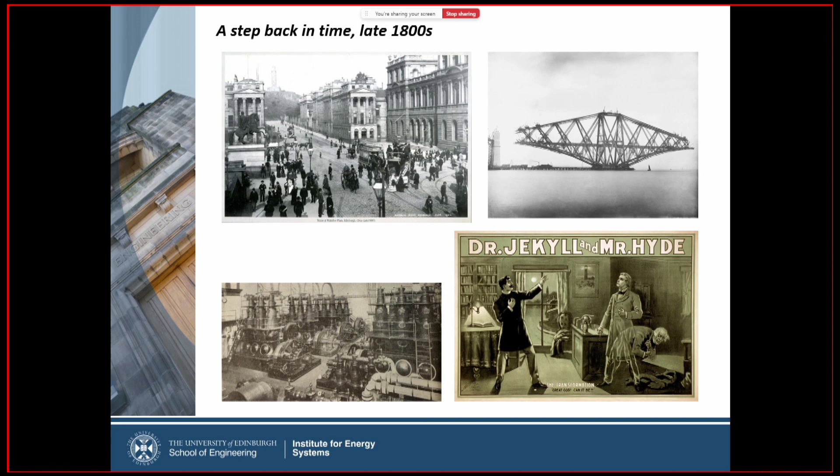It's Halloween now, so I was thinking about Halloween. Dr. Jekyll and Mr. Hyde, written by Robert Louis Stevenson. And the one thing that we proud engineers here at Edinburgh know is that Robert Louis Stevenson studied engineering here. And if you go to his Wikipedia page, the one thing that you read is he hated engineering. And apparently he did everything he could to avoid going to lectures. Amazing. He was such a forerunner for many other students. I joke. But anyway, at that time was a great change in society, technology, the way that people were understanding the world. And there were lots of mechanical, structural, chemical and electrical engineering challenges. Like today, a great time of technological change.

And around about that time, here at the University of Edinburgh, not studying in a school of engineering but natural sciences or natural philosophy, was this gentleman here, James Blyth. In '61, he graduated from here with his Bachelor of Arts, and later on he came back to the university to study a master's. And he was a real inventor, really interested in technology. He started to play with what we would recognize as electrical power engineering, batteries, generation of electrical power. He subsequently went on to become a professor at what's called Anderson's College, the precursor of the University of Strathclyde. And it was at his holiday home on the east coast of Scotland in a place called Marykirk, where he was the first person in the world to design, build, and test a wind turbine.

Now, that was what Marykirk looked like in those days, okay? And here are some of the pictures, quite grainy pictures of some of the first turbines that he built. Hopefully you can see that there. Okay, there's one of his turbines just about there. Okay, turning around and looking at it from the house, you could see that there.

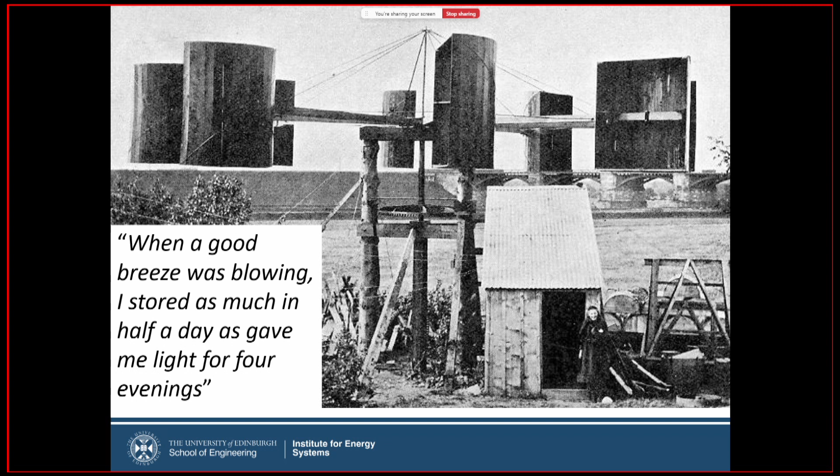A real inventor. Imagine going down to your garden shed and building this kind of thing. And it was really successful. He said, when a good breeze was blowing, I stored as much in a day, half a day, as could give me light for 4 evenings. He had batteries. He was able to store this electrical energy.

And he had so much, this abundance of free energy, that he thought, well, I'm a good person. I want to make the world a better place. I'll offer it to the people of Marykirk. And he talked to the village elders and he said, would you like me to install some of these new electrical lights and use our wind turbine to power that? And they said, no. They said, it's the work of the devil.

We don't want it. So that's the starting point for today's talk, about the things that scare us about wind energy, the monster turbines that make shivers run down our spines, and some of the scary engineering science of wind energy. So, let's get into that. You may notice a few Halloween bits in this talk. So if you want to keep a count of all the different scary things that come up, we'll see how many we have at the end.

So, today, why are we interested in wind energy? Let's have a little look at that. And there are a few different reasons why there's so much interest in the outside world about wind energy today. And some of these will be familiar to us, but let's quickly fly through them. One of the things that we hear a lot about at the moment is net zero, moving towards a society where we have reduced our carbon emissions.

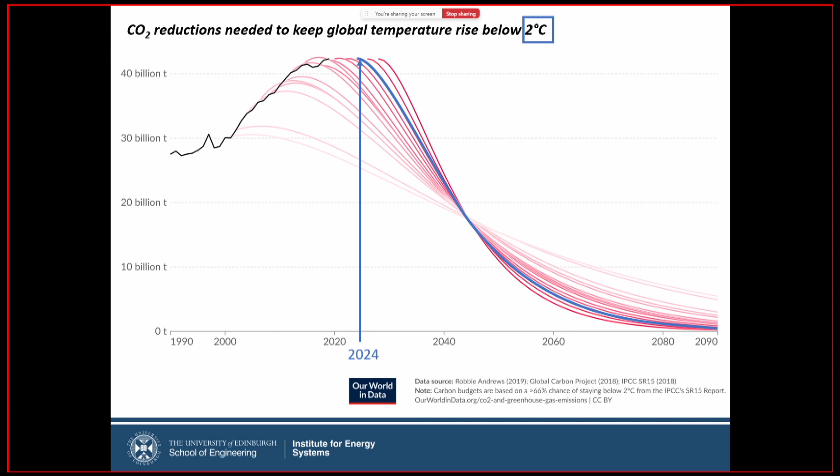And here, this is some of the work that informs many of the different international treaties that we sign up to. And this is what we need to do as a world if today we start seriously trying to reduce our greenhouse gas emissions. And we have to rapidly reduce the amount of emissions in every country. Whenever I look at this graph, I'm reminded of a saying that my Irish in-laws always tell me, that this isn't the best place to start from. If we'd started a few years ago, our transition would be much easier. But we're moving towards an energy system which doesn't release as much greenhouse gases.

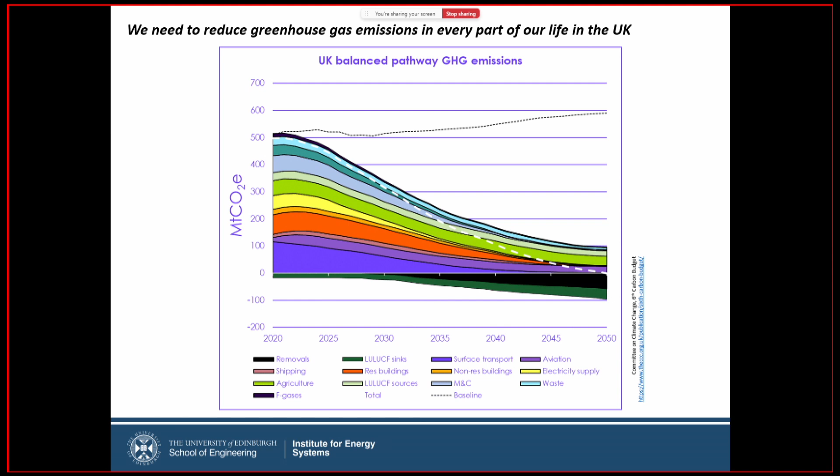As we cascade from that international motivation down to the UK motivation and what we want to do, this is from the Committee on Climate Change. In every sector, in every part of our life, in every part of our society, we need to reduce the amount of greenhouse gas emissions. And that means moving every sector to one which is using renewable energy to provide that energy.

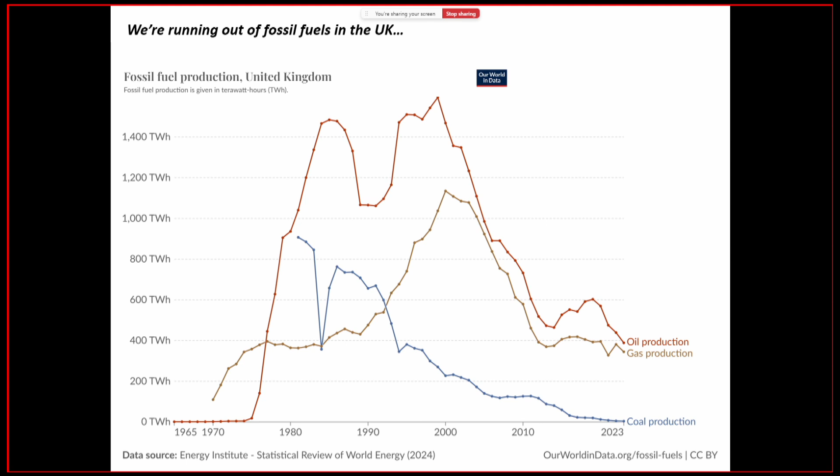Even if that wasn't happening here in the UK, we have other motivations. We have motivations in that the forms of energy that have been driving our society for decades or centuries are running out. So the costs of extracting oil and gas mean that the amount that we have available is reducing. So self-sufficiency and energy security require us to move to something which doesn't rely on imports.

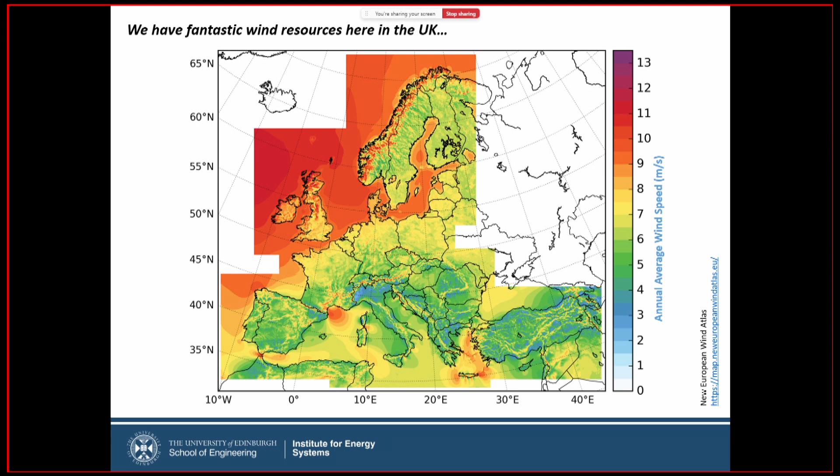The other reason why wind energy here in the UK is because it's, well, really windy. And that we instinctively know, but here we can prove it to you. The darker colors here mean it's really windy. And in the UK, Ireland, anything that's close to the Atlantic, fantastic wind energy resources. We are blessed by how good our wind energy resource is. And that means that the cost of generating electrical power from wind is much lower than in many other countries.

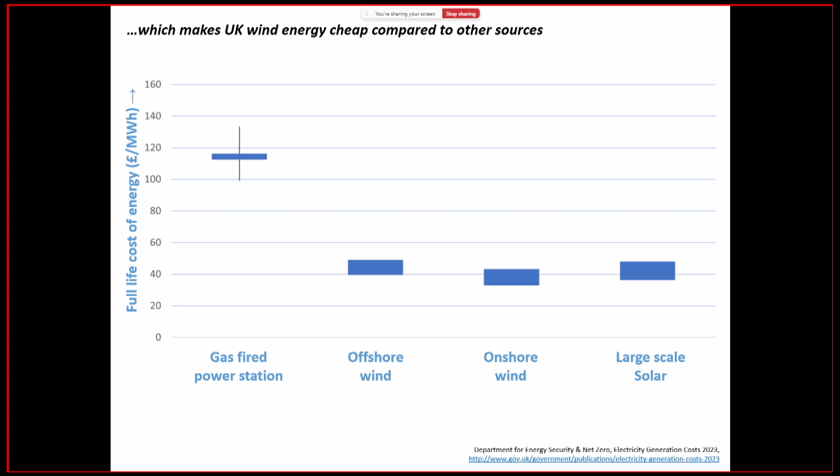And different people look at the different costs and the through-life costs of different technologies. This is some data that comes from the UK government. And it tells us that today, wind energy can deliver some of the lowest lifetime costs of energy. So it's good stuff. It's good stuff to go for.

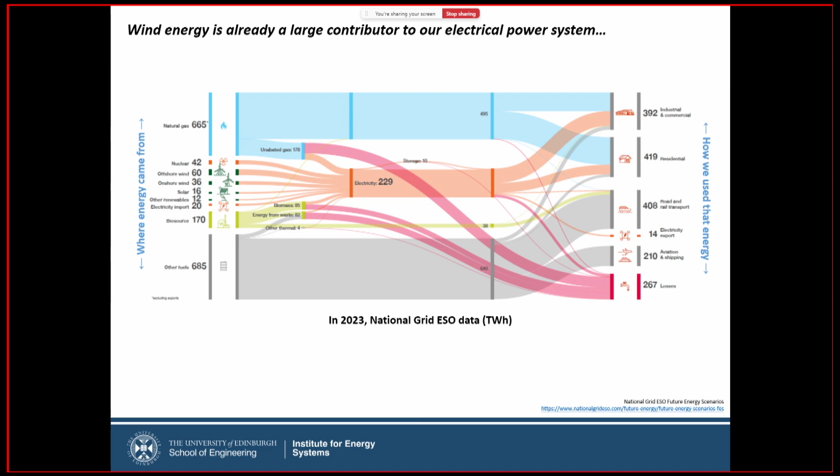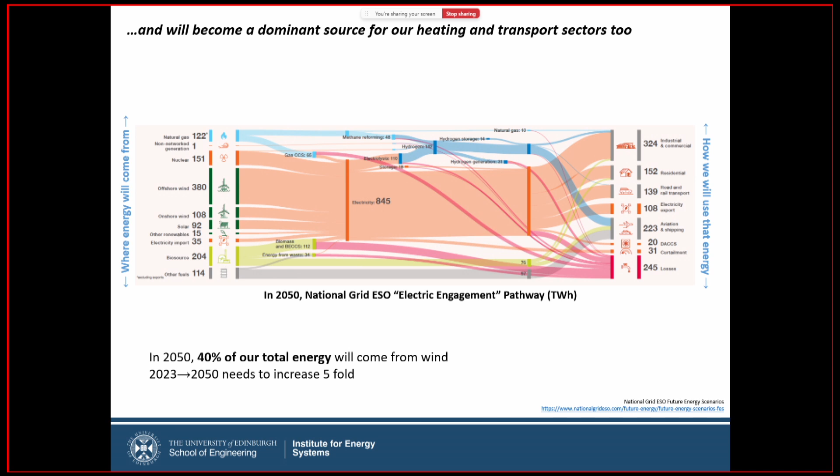The plans, the forecasts, the scenarios, and the pathways to getting towards net zero look a little bit like this. In 2050, according to most of these different pathways, 40% of our total energy, the energy we use for heating and transportation, is going to come from wind energy. That means we need to scale up by about a factor of 5 how much energy we get from the wind.

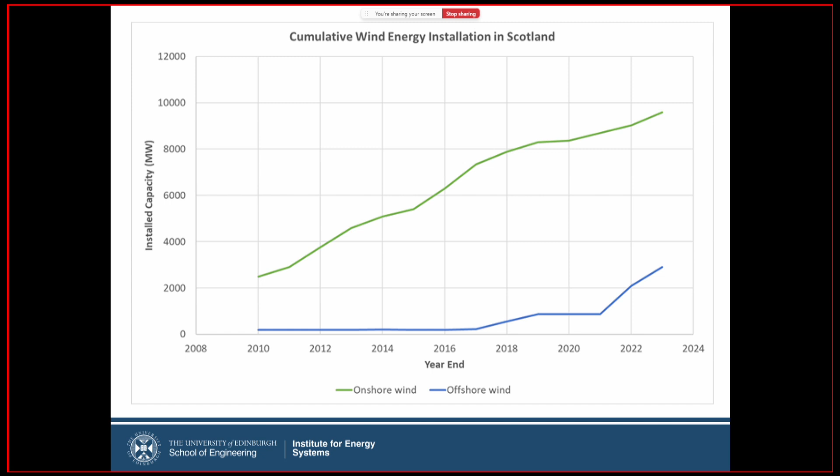These are really big numbers. How are we doing in terms of getting there? Well, we've got good news. In places like here in Scotland today, if we look at the last few years and how much wind energy we've been installing, we're making good progress. Green here is onshore wind in Scotland. Blue is offshore wind. That's taking off and starting to increase quite significantly, and will continue to do so over the next few years. Good news.

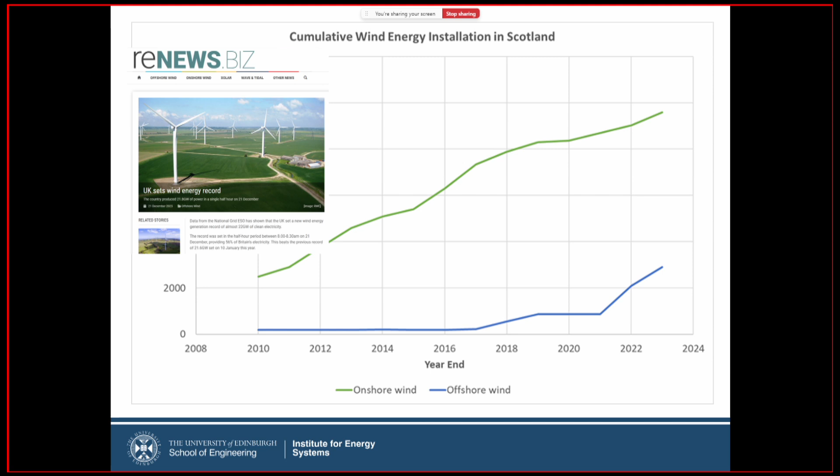If we look at it from the UK perspective, every year, it seems every month, we seem to be smashing records. The most in a year. Wind energy is starting to dominate our electrical power system. Records coming down. Really good news.

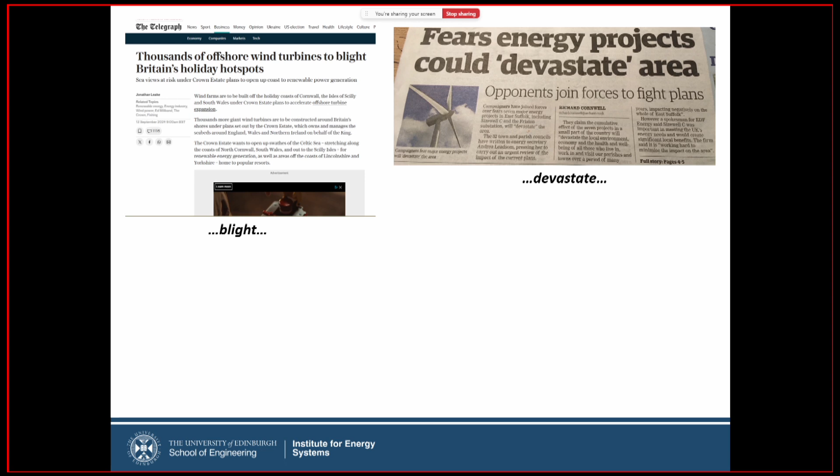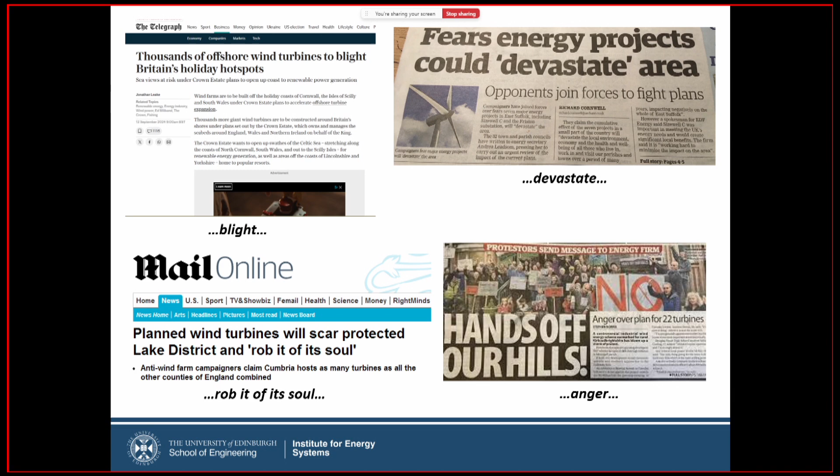But I'm sure many of you also have a look at some of those newspaper headlines or things that pop up on social media. Headlines that say things like, wind turbines will blight your holiday hotspots. They will devastate your area. They will take where you live, the landscape, and rob it of its soul. And just angry. And it appears to me that wind turbines really scare us, or some of us, or we worry about them.

So do they scare us? Why do they worry us? If you have a device, I'm going to poll you, see how you are. You can either use that QR code, or you can go to wooclap.com and add in that event code, and you will be asked 3 different questions. Those questions: the first will be about your support for onshore wind energy, your support for offshore wind energy, and it will give you a scenario where someone is going to build a wind farm near you, maybe at Blackford Hill, if you live near here.

Think about it as being Blackford Hill. How much do you think about that? What do you feel about that? Is it working? Yeah, it's working, okay. We'll use you as a little sample, and then I'll show the results as they come in, and we'll compare you to the general public.

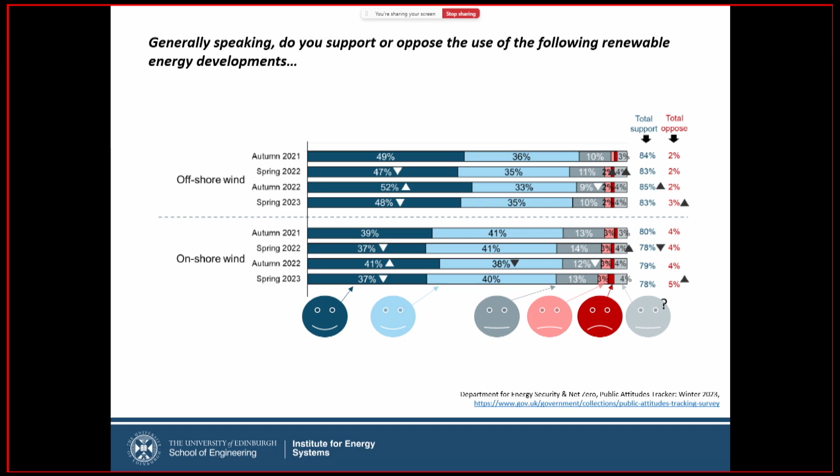Okay, back to there. So if we looked at the general public, there's a slight discrepancy between offshore wind and onshore wind. Generally people are quite happy with offshore wind because it's somewhere further away from me. And if we slightly bring it, still in the abstract and the generic, bring it slightly closer, onshore wind, but not where I live, it's still very happy. And that's what happens generally if we keep on going back to the UK public and asking the question again and again. These numbers change a little bit from quarter to quarter, year to year, but generally speaking, people are very positive in the abstract.

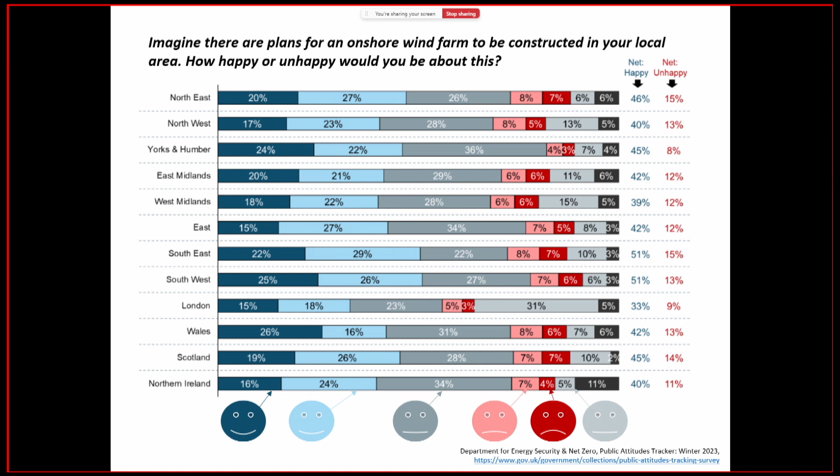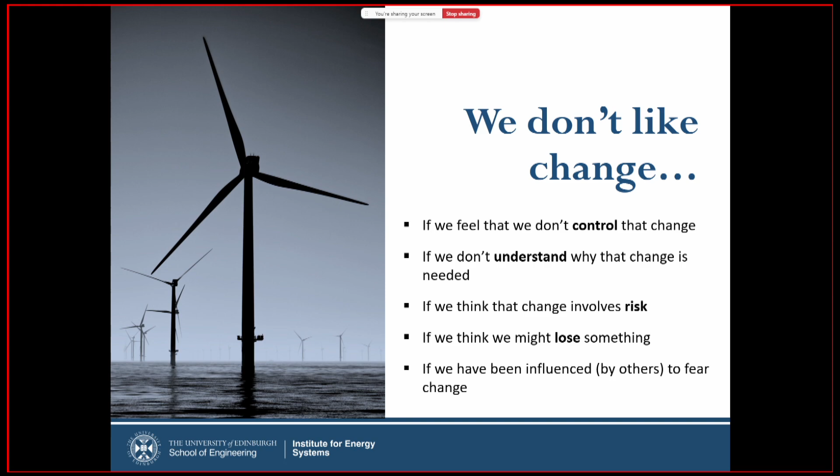And why is that? Are you hypocrites? Well, we probably are. But it's a slightly different question. It's a generic question, an abstract question, versus a real question. And one thing that I've kind of noticed throughout life is that generally people don't like change. And we particularly don't like change if we feel like that change is something that we're not in charge of, that is happening to us, so we don't have control. If we don't really understand or believe we need to have that change. Sometimes if we think that change has a risk. And sometimes if we think that we might lose something with that change. And the other thing that sometimes happens for those of us that work in renewable energy is that sometimes there's information which isn't quite correct, and it sometimes feels like people are influencing others to try and reject that change, and some of those headlines are to do with that.

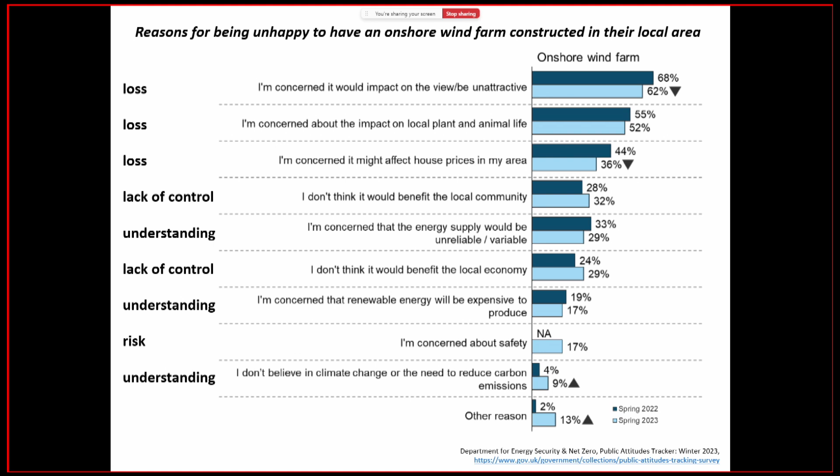If we go and ask the public why you're not interested in it, why you don't want wind energy, and dive into the details, they talk about things like noise, view, things like that. And we can partition these into different aspects. And actually the planning system looks at a lot of these different aspects and tries to make sure that wind turbines and wind farms, when they're built, make sure these aren't a problem. But you could think about these as those where it's being done to us, people are making money, we're not going to benefit from it. That's control being done to us, we're losing control. Sometimes it's because people don't understand the motivation or don't believe in it. Sometimes it's risk, I want safety. And sometimes it's a feeling that we might lose something, and that might be our visual amenity.

You're welcome. Now, today, it's not like that. We can't have big, concentrated power stations. We need renewable energy, and it tends to be quite dispersed. Now, unfortunately, that means we need to put more devices out there. And that does mean that we need to democratize and spread out the change in visual amenity.

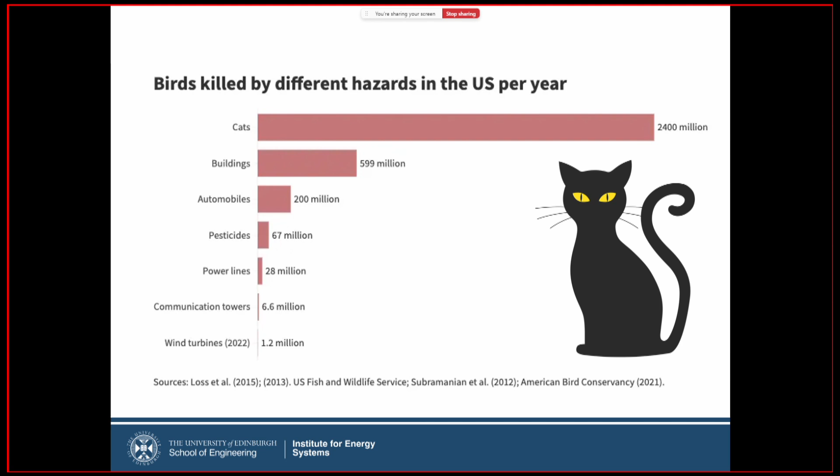So, joking aside, the things that we do when we're developing and planning a wind farm include really quite significant surveying of bird life to try and make sure that the impact on bird life is minimized. Yet at the same time, we don't do anything like that when we build a building. And so we actually set a higher threshold of evidence for wind farms.

House prices, that's something that people really care about. This was some work done through the Climate Exchange, which has run out of the city centre here. They were interested in how putting a wind farm near a property affects property prices relative to a control somewhere else that doesn't have any wind farm. The conclusion they came to was that it doesn't really make that much difference at all, which I found quite surprising.

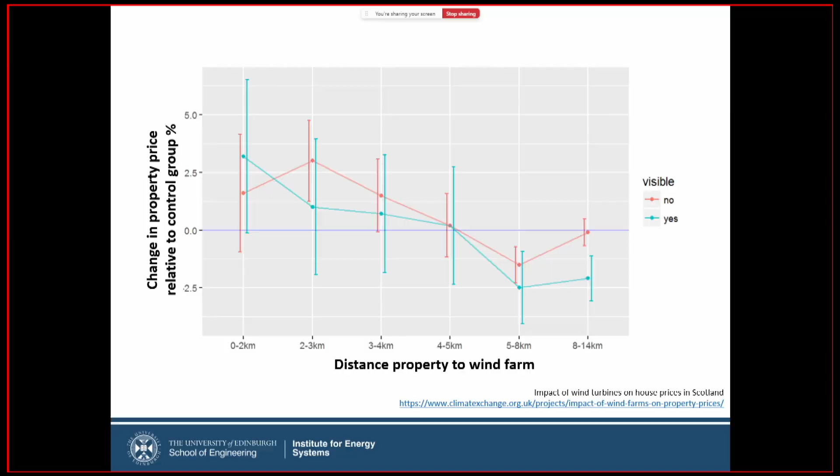The other thing that people worry about in wind energy is how expensive it is. Actually, the interesting thing about how our energy system works today is at any given moment in time we find all the different types of generators, going from the cheapest on the left-hand side to the most expensive on the right-hand side. When we work out how much electrical power we need, we take the price of the most expensive thing, and that's what all the generators get.

Today, on most days in the UK, the most expensive thing is gas. The only thing we could really do to bring that electricity cost down is to try and increase the amount of renewable energy. Many people worry about the price of electricity - you read it in the paper. Is this because of our net zero? Is this the reason for our electricity price? No, the reason is it's so expensive today to make electrical power from gas.

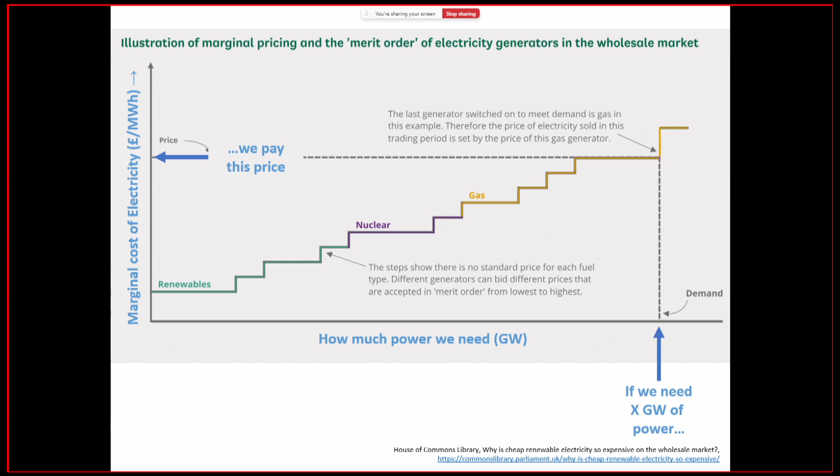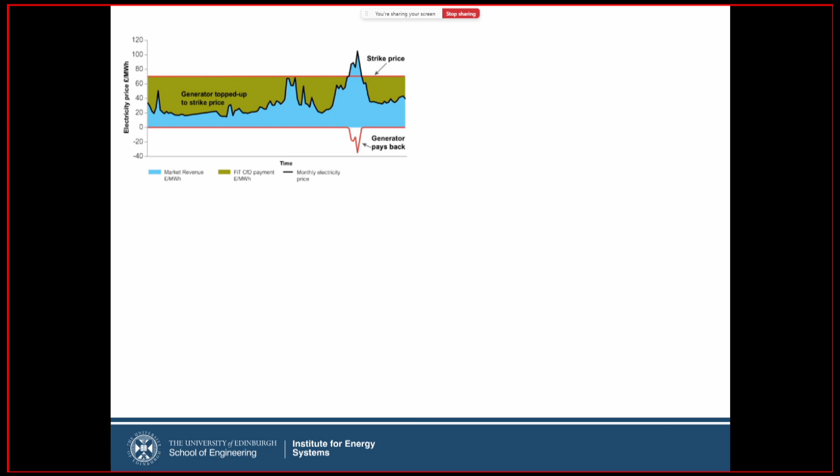Indeed, if we look at what happened during the problems in Ukraine and the subsequent cost of gas, in some of the ways we produce and sell electrical power today using something called a contract for difference, when the price went really high - and some of these have what we call a strike price or a limit price - when the price of electricity goes above that, they start paying money back to us. That's what happened during that moment when the cost of electricity went really high.

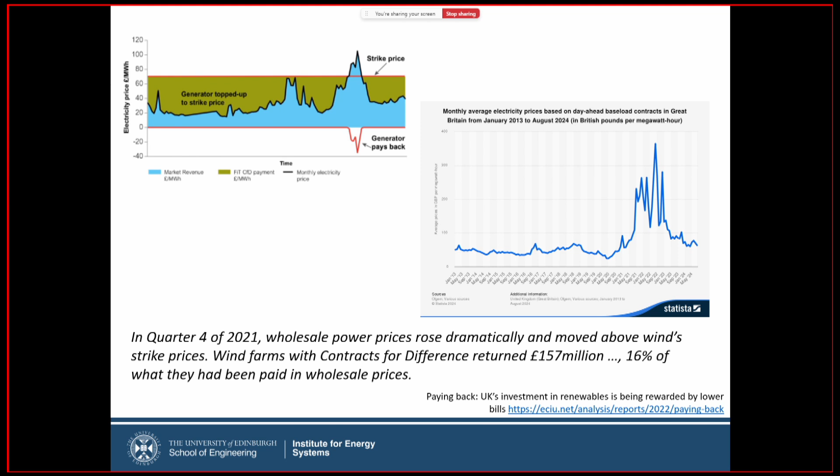The wind farms with contracts for difference started to pay us money back. They were starting to reduce the amount of cost. So actually, today, relative to some of the other ways of generating electrical power, wind is relatively cheap compared to some of the competing technologies.

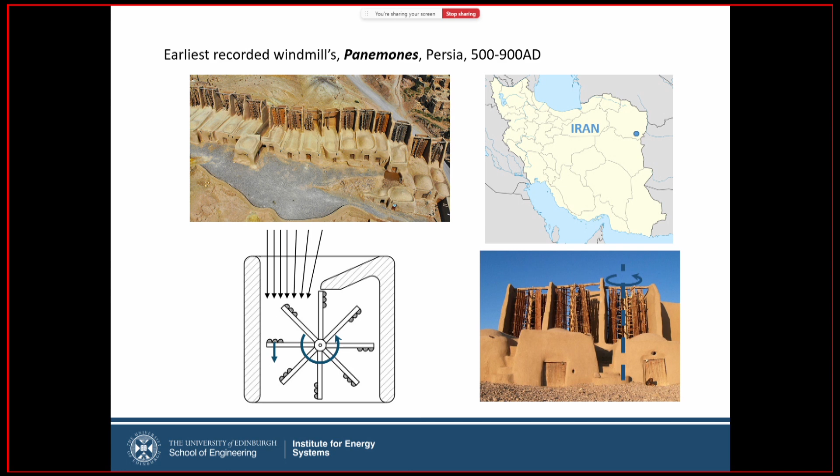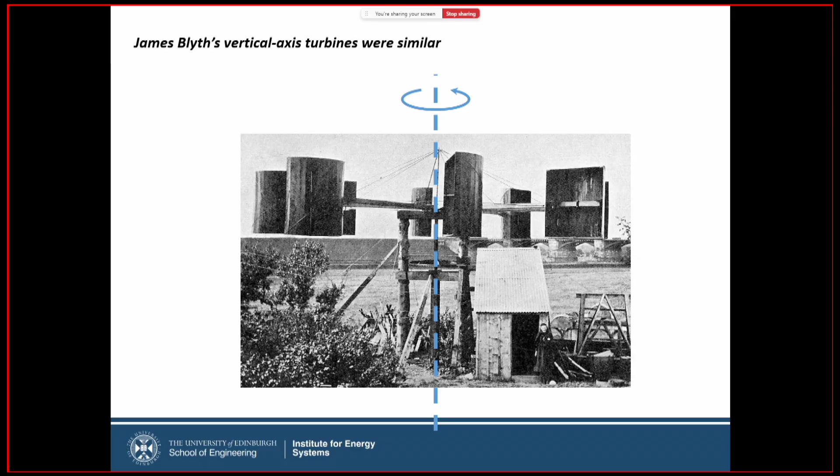James Blyth's system looked very similar to that. Again, it's a vertical axis turbine. There was no wall to protect one side of the rotor, but rather he had sails shaped in a particular way, where one side of the sail has a certain drag coefficient and the other side has a different drag coefficient. That differential force forces the thing to go round. That's how he started.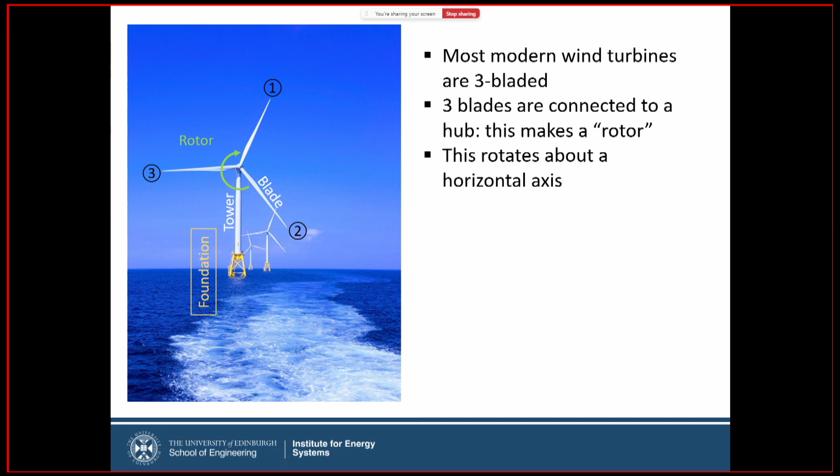But if we look at modern wind turbines, they're what we call horizontal axis. They have 3 blades, connected together to something called a rotor, and they turn. We've got a little one down here that we'll look at in a bit.

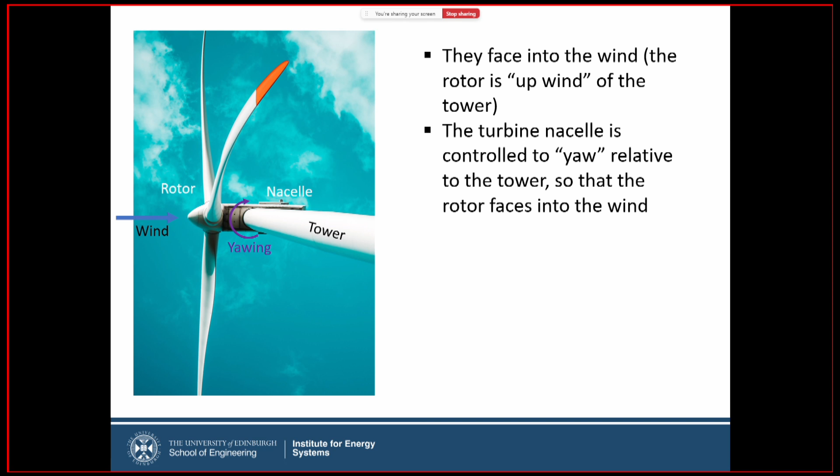Generally, the rotor is positioned in front of a tower to always point towards where the wind is. Wind direction changes quite frequently, we measure that, and the turbine yaws, moving the rotor to face into that direction.

As the rotor moves around in space, it actually sees wind from two different directions. One is the wind moving towards it, but also if you were to hold on to this turbine blade as it rotated through space, it would appear as if the air was moving towards you. That blade is rotating, and if you held on to it, it would look like the world was moving towards you, the air was moving towards you. So that in itself looks a bit like wind.

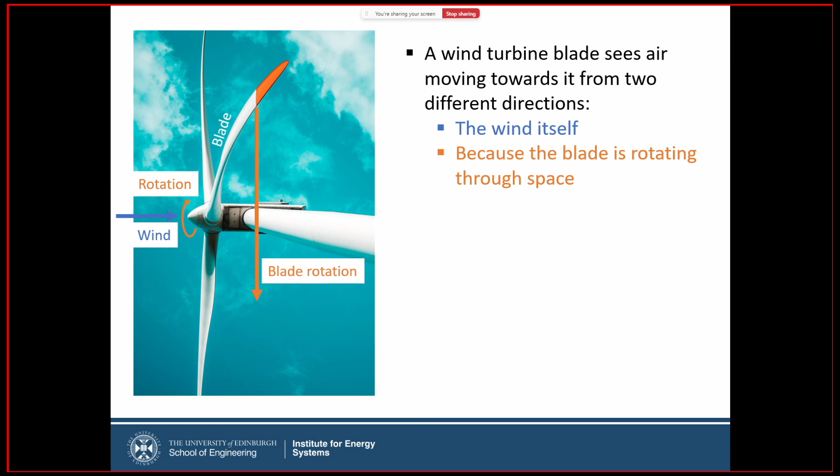These wind turbine blades move through space so quickly, often about 100 meters per second for an offshore wind turbine, maybe 70 meters per second onshore. That's about 8 to 10 times faster than the actual wind moving towards the wind turbine.

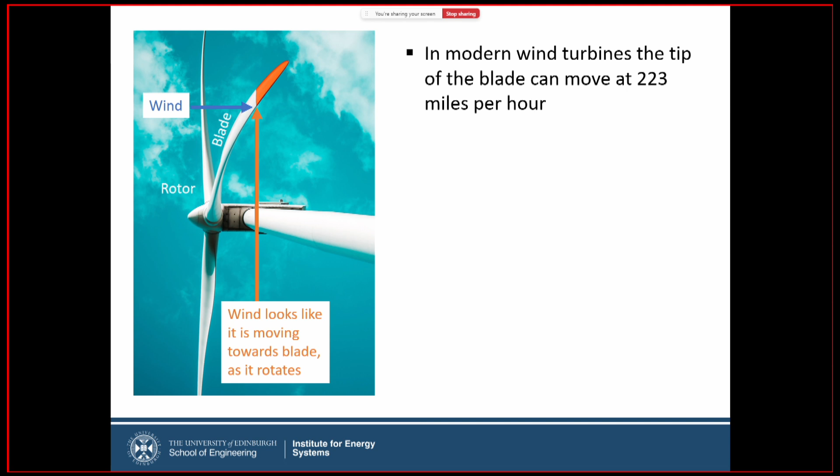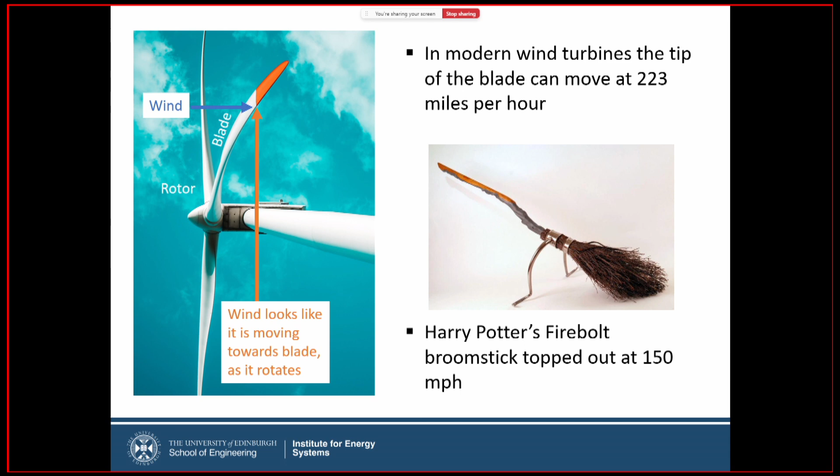I looked this up in terms of witches and wizards. A tip at 100 meters per second is about 223 miles per hour. Harry Potter, I had to look this up, first started with the Nimbus something, which was quite good, but then got upgraded to the Firebolt, which is 150 miles per hour. There's something called a Firebolt Supreme, but it didn't tell me how fast that was. So anyway, the blade tip is faster than Harry Potter is moving through space.

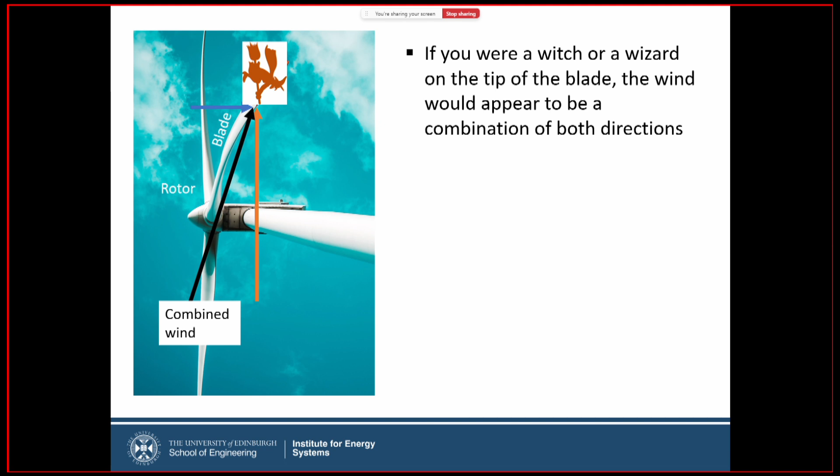If Harry Potter wanted to hold on to the tip of the blade, he'd be having the ride of his life. If you were a witch or wizard at the tip of the blade, it would appear as if the wind was coming slightly from you, the wind itself, but also you're moving through space and it's moving towards you. The combination of that produces a result.

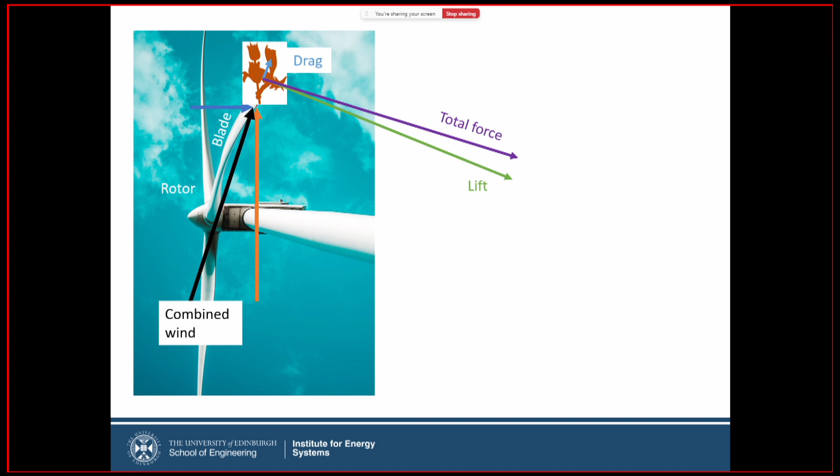You would feel a lift, a big force following the green bit, and a little bit of force starting to slow you down, called drag. You can combine those two together to get a total force, and you can do that at every bit of the blade and add them together.

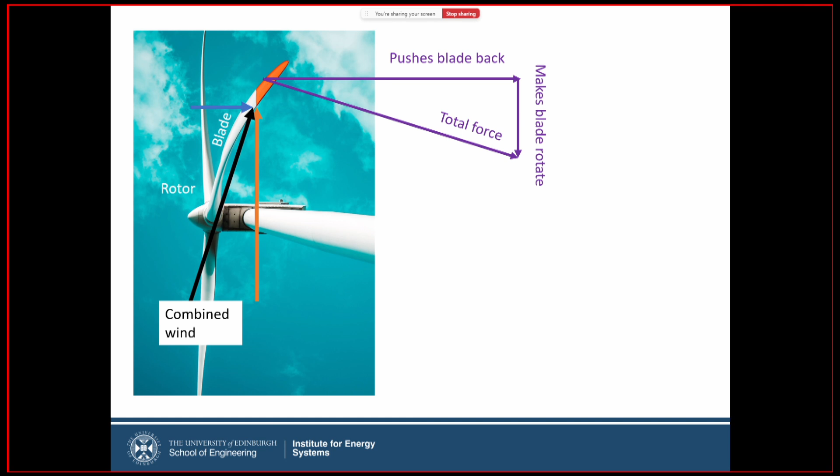When you add them together, you get two components on this rotor: one tending to bend or force the blade back towards the wind turbine, and another tending to push the blades forward to make it rotate. One of those forces we call thrust, which gives structural engineers and designers of these wind turbines headaches. The other component produces something called torque.

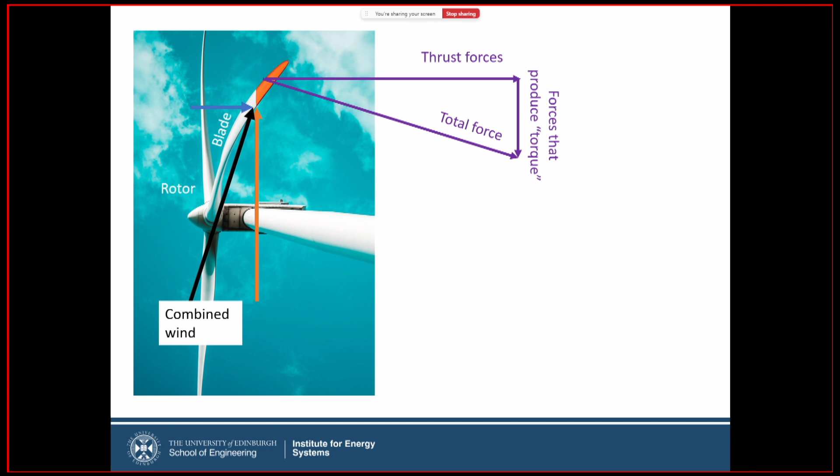Torque is like when you've got a jam jar and you're trying to open the lid - you apply a force at a distance from an axis, and you twist it and it rotates. It's that torque which we're going to use to produce electrical power.

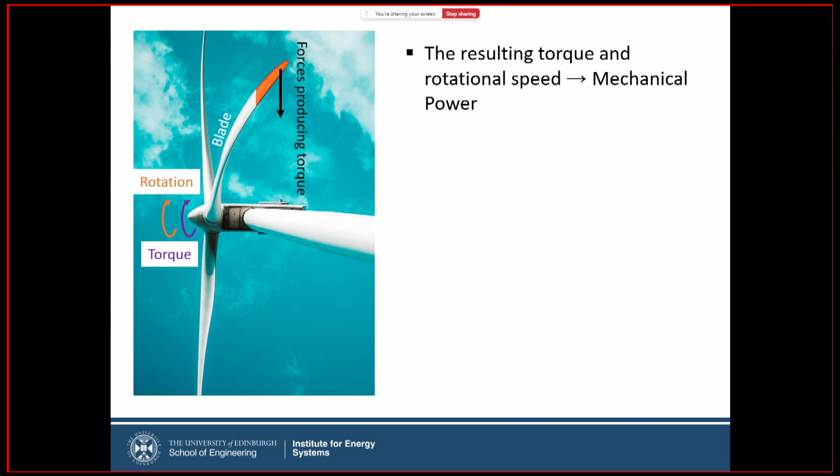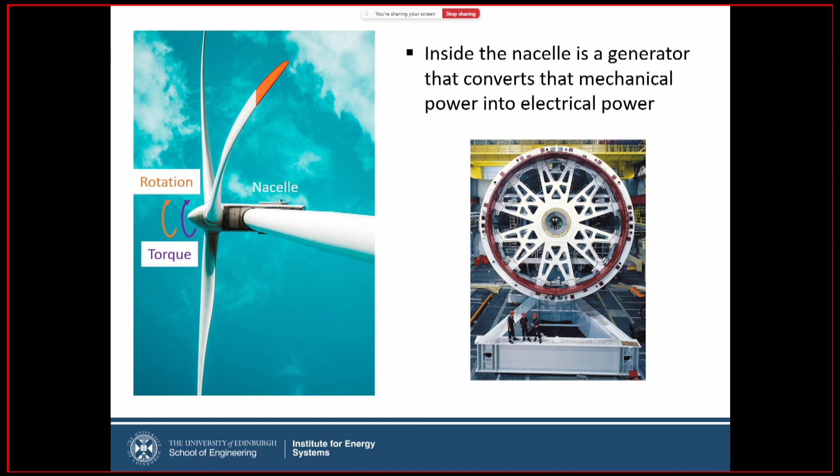So we have this mechanical power on a shaft, and inside the nacelle is something like this, or it might look like this. Here's an electrical generator, and this is the thing that's going to accept that mechanical power and produce electrical power. Look at that generator in there - it's really big. There are some people down at the bottom - these are not little mini people.

These are just normal people of a regular size. And I looked up, if they were zombies, a zombie is on average 1.65 meters high. So you could see how many zombies across that would be. I reckon 6 to 7 zombies in diameter.

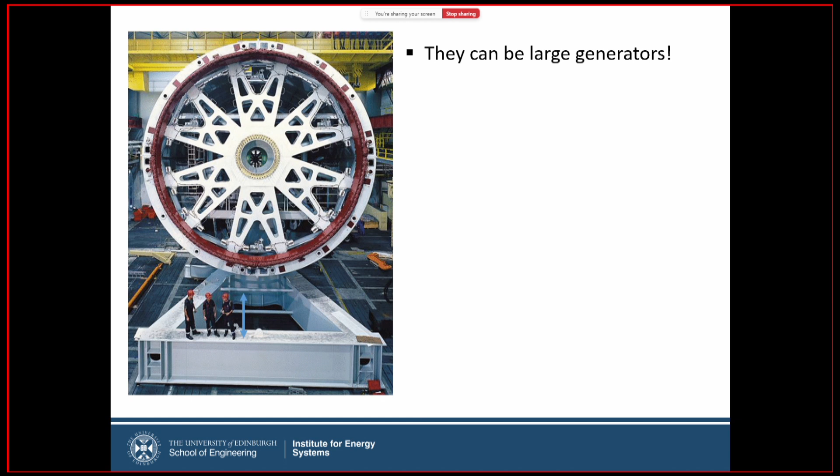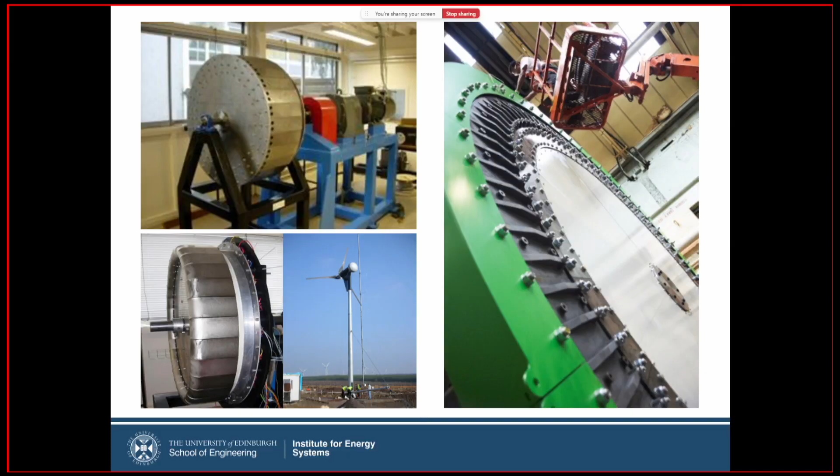This is actually the bit of research that myself and other colleagues here at Edinburgh look at when we look at electrical generators, we love this stuff. I'm not going to talk about it, though, but it's really interesting. When we work in the lab, and Marcus, I can see Marcus here, this is some of the work we've done together over the years, designing different types of cool electrical generators that are lightweight, amazing, highly efficient, reliable, and do all sorts of things. That's what we do, that's what I do as my day job.

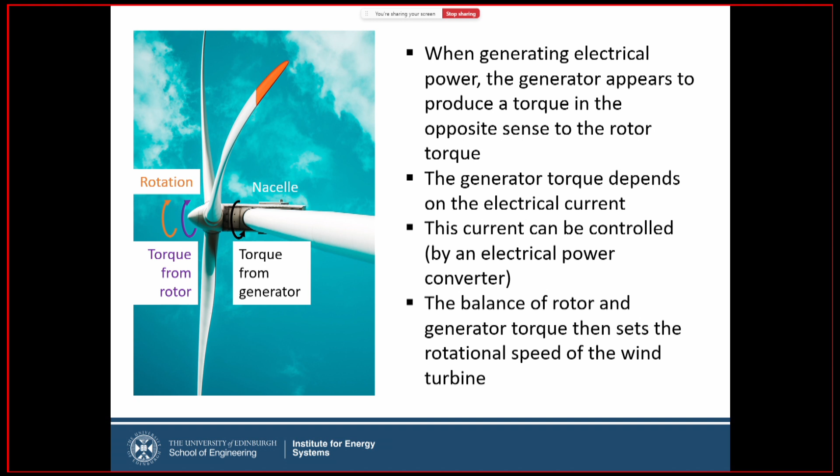Now, when we're generating electrical power, we're going to turn that into volts and currents, but we also appear to produce a torque in the opposite direction to that from the wind turbine rotor. The amount of torque, this twisting force we can produce, depends on the current that flows in our generator. Our colleagues who work in power electronics, I can see Paul at the back, control how much current is flowing in our generator, and therefore how much torque the generator produces. The balance of the mechanical torque and the electrical torque tells us whether this rotor is going to accelerate, spin faster, stay the same rotational speed, or decelerate. So they are the people that control how this turbine is going to work.

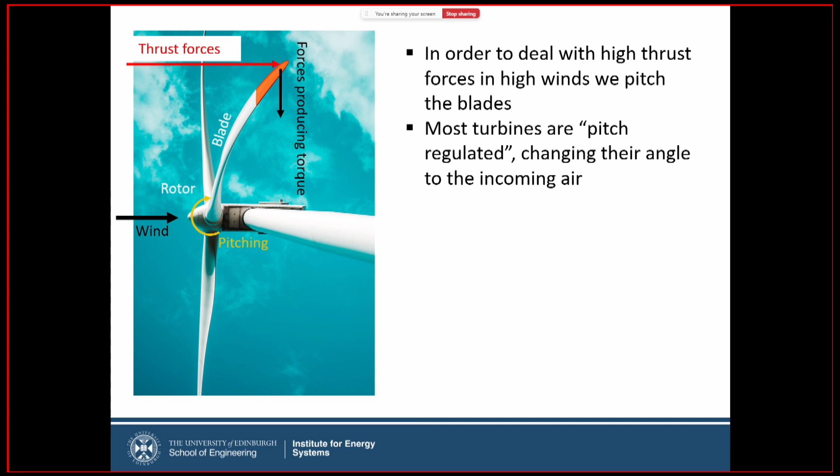When the wind gets really windy and we worry about this thrust force, and we want to maintain a certain amount of power, we can also change the orientation of the blades. We can pitch them, and we have different mechanisms for doing that. Most modern wind turbines are able to do that pitch regulation to limit the thrust force on the system.

Okay, I think it's time we show this in real life. I was wondering, could I have a volunteer, someone with long hair? Cora, I'm looking at you. Can you come out here? Okay, come over here, you stand here.

What I'm going to do, just before we play with the turbine which is here, I've got a fan - this is my mock wind. We've got a few different settings, and we're going to find out how windy it is. Come a bit closer, if that's all right. I'm going to turn it on. This is why you needed the hair. I've got an anemometer, this is measuring air speed. It's not working at the moment, so we're going to use hair speed instead.

Right, come a bit closer. So this is probably about 4 meters per second as a wind speed. This is a wind turbine, we're just about starting to go now. If I go up to here, I think I measured it before at 6 meters per second. For a wind turbine, this is still just really getting going. It's when we get up to about 12 meters per second that we're okay. I'll turn it down for a second.

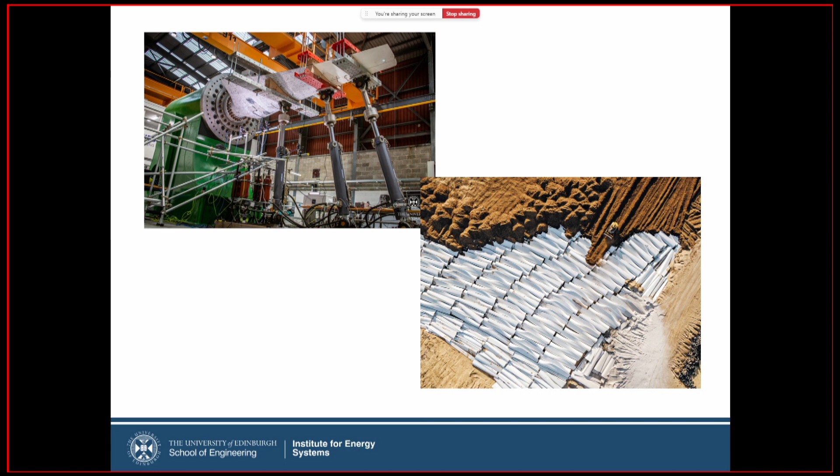And I was with colleagues today over at Fastblade in Rosyth, where they're testing composite turbine blades, a state-of-the-art facility. And we have colleagues here in the Institute of Materials and Processes looking at how you recycle those blades when they come to the end of their lifetime. Really exciting, important aspects of turbine design.

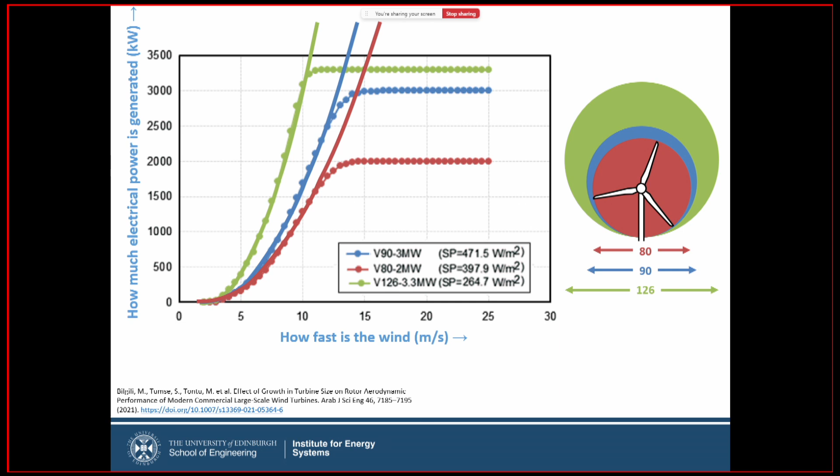Okay. When we look at wind turbines, the amount of power that we produce, I said, depended on the velocity, the wind speed. It also depends on how big the turbine is. And how big the turbine is, is basically the area of this big circle here on my right. Okay? So the bigger that rotor is, as I move from one turbine to another turbine to another turbine, tells us how much power we can produce, and therefore at what wind speed we can produce it. And as we see today, turbines are getting bigger and bigger.

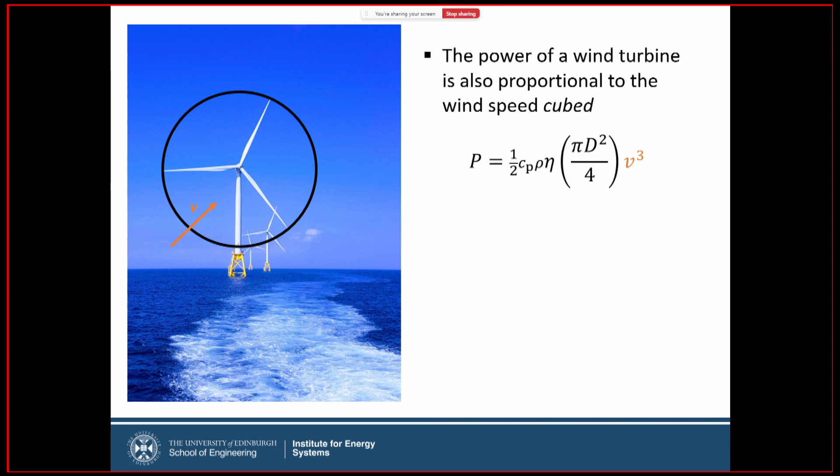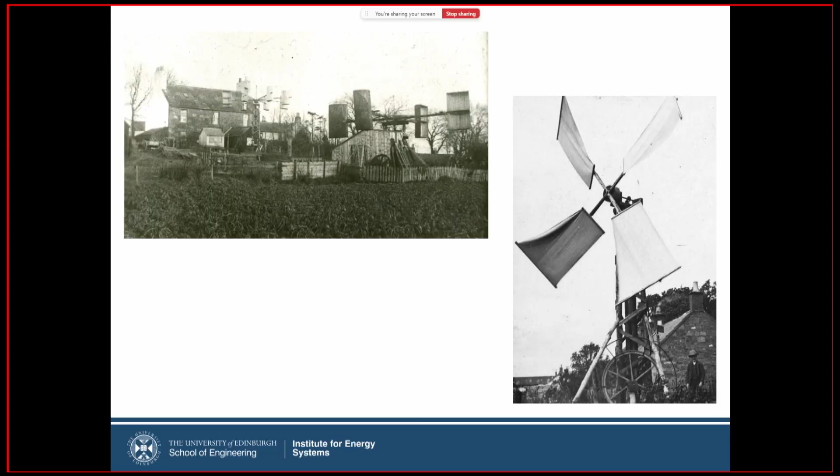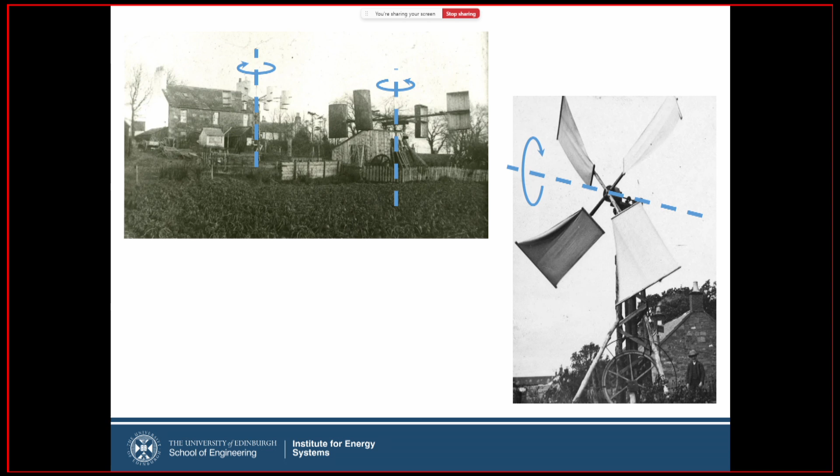I'll move on here. Now, the other thing that determines how good a wind turbine is, how much power we're going to produce, is how good our generator is, how good our electrical system is, but also how good our rotor is. And even Blyth, when he was playing around with wind turbines in his garden, was looking at vertical axis turbines and horizontal axis turbines, looking for turbines that will extract more and more power from the wind.

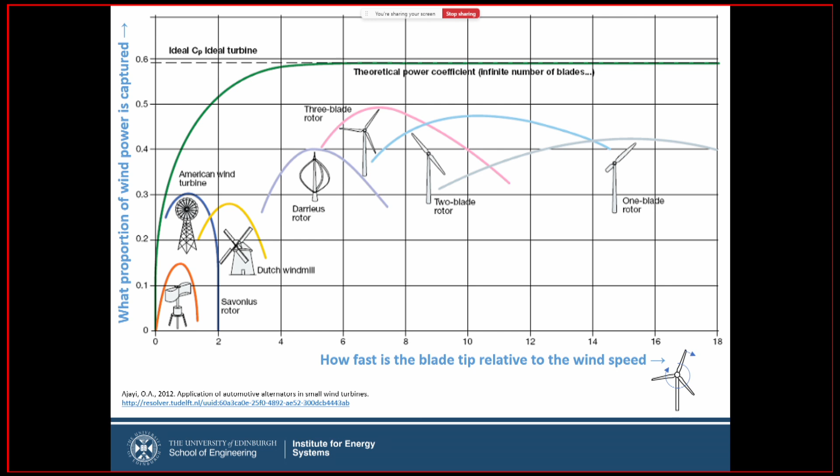And the modern three-bladed wind turbines tend to give very good power extraction, high power coefficient, and also do it at a high rotational speed. So the blade is moving relatively fast relative to the wind, and that means a high rotational speed, and that makes the job of turning this into electrical power quite a bit easier. And this tells us, as we go to one of those curves, we need to be able to control the rotational speed of the turbine.

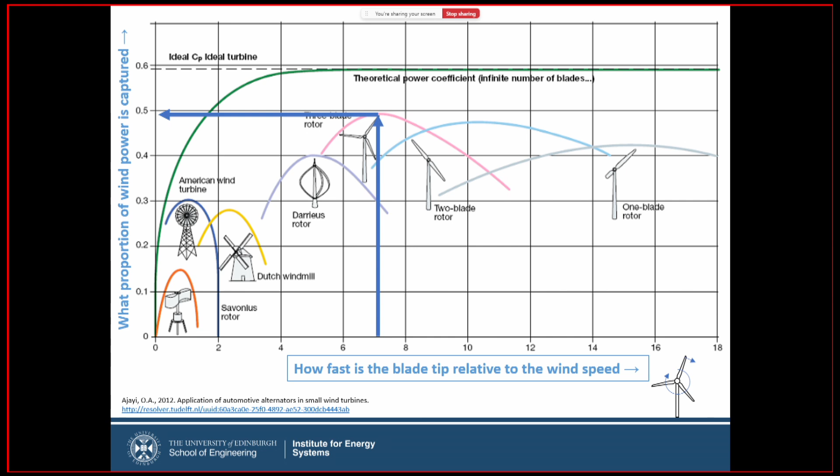Okay, so that's how turbines work. I've got a few minutes left. You now understand the magic of wind turbines. I've now made sure that you're not going to be scared as you walk out the door, and you're not going to be attacked by a wind turbine. But I'd like to let you into a secret. Actually, there are some really scary things about wind energy. What are the really monstrous things? The really scary thing is how many challenges there are out there today.

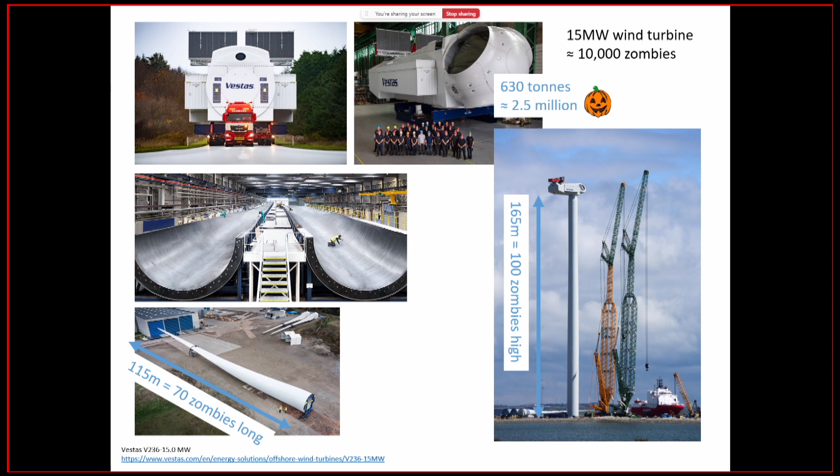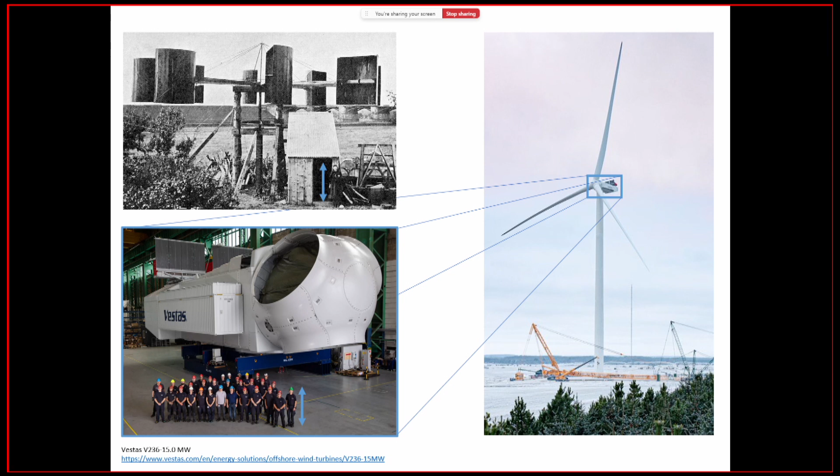Massive pieces of engineering. And these are pieces of engineering which are far bigger than the people that work in designing aircraft. Bigger even than some of the big structures that we look at today. Massive engineering challenges. The cycles of loads that they go through is awe-inspiring.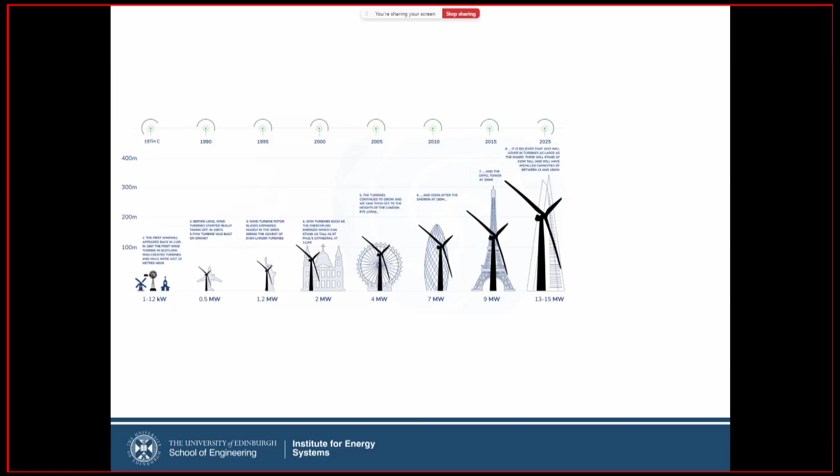I thought that this slide was going to be okay until last week, when there was a couple of new turbines, a 26 megawatt one in China by a company called Dongfang. And I think even today there's been another one that's even bigger than that. These turbines are getting really big.

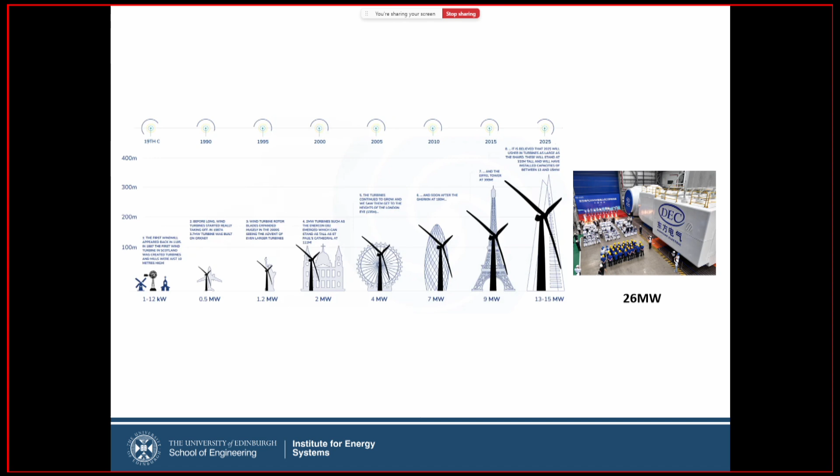The reason why they're getting really big is that when we put these offshore, we want to reduce the number of turbines. It reduces the number of things that we need to put into the sea, the connections between them, and the fewer that we can have, the better. And unfortunately, that means that they get bigger, and that makes designing them even more challenging.

The other thing that scares me about wind energy is that we're going to have to connect it to our creaking power system. So today, round numbers, if it was a really good day and we were producing all the generation we could in Scotland, it would be about 18 gigawatts. That's a big number. And our maximum demand might be about 4 or 5 gigawatts. The amount that we can export, send electrically to the rest of the UK, is about 6 gigawatts.

Why? Because we haven't spent very much on our grid in the last 2 decades, despite us knowing that this was going to happen. That's not the bad bit. The bad bit is we're going to put in much more generation. The demand is going to go up a little bit, but not much, so we need a bigger grid.

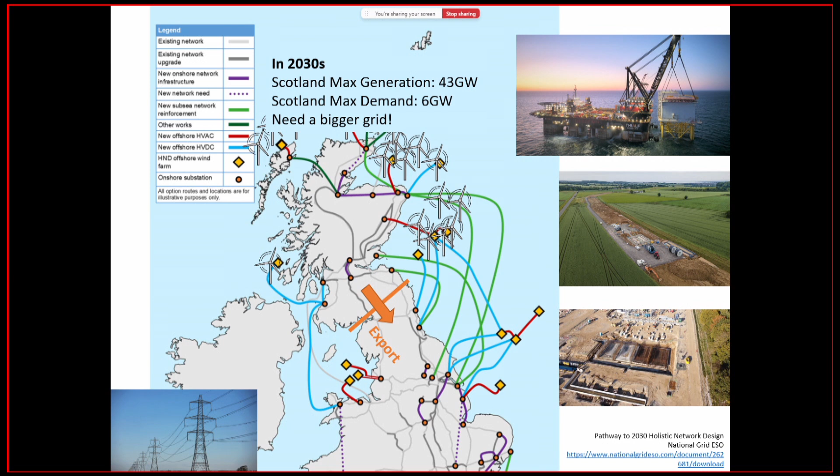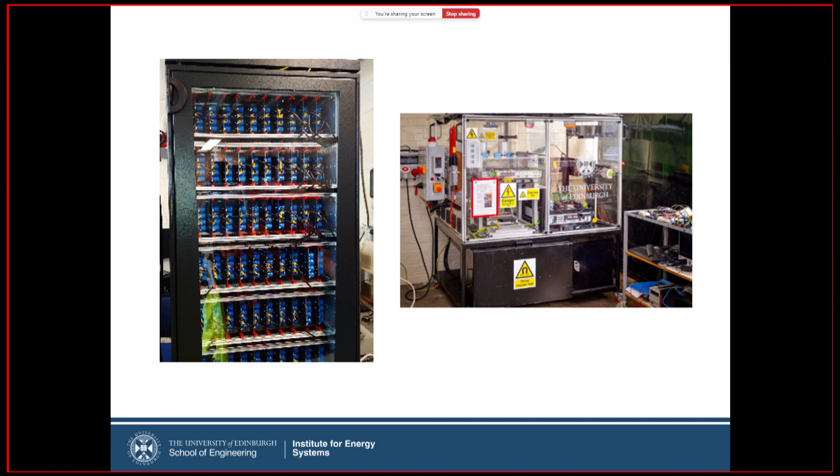Okay, and that's going to need lots of people doing lots of things with lots of skills and lots of change to our electrical system. And that's where our colleagues in power electronics are working on HVDC and amazing power converters that are sending large amounts of power at very high voltage efficiently and as cheaply as possible. And again, that's pictures taken from our lab.

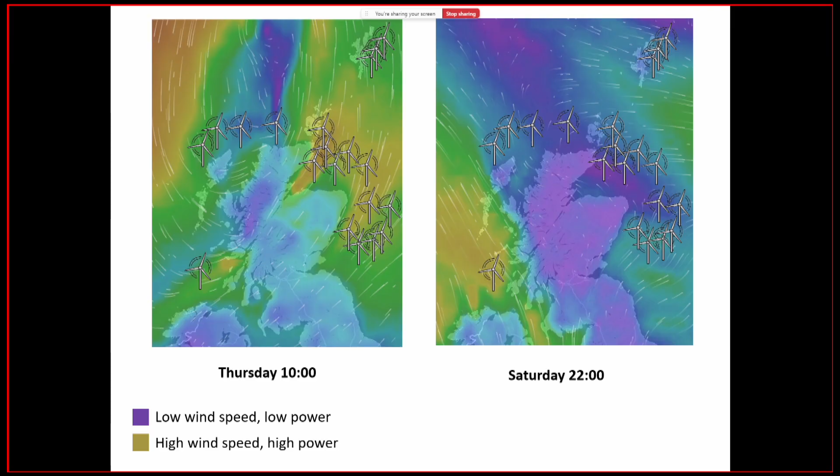The further away we put our wind farms from each other, the less correlated they are with each other. It means that they will see the peaks and the troughs of wind energy at different points in time if we push them further away from each other. So one of the things that people are now thinking about is how do we push those wind farms further away from shore?

One of the exciting things about working here at the University of Edinburgh is that we have a fantastic facility just up the road, FloWave. In there, they are testing small-scale, different turbine foundation systems. We're in there with Tom today having a look at that. It's amazing some of the work that colleagues are doing in this area. Really lucky to be here at the University of Edinburgh working on some of those systems.

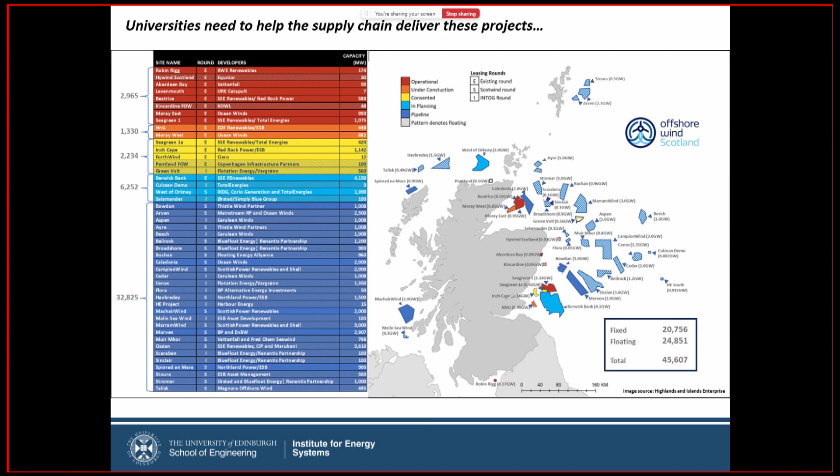We're reflecting a little bit upon what our role as a university is, or universities in general. How can we help here? Well, over the next few years, there are all these different projects that are going to be delivered here in Scotland. And there's hopefully lots of companies and organizations and supply chain that's going to help deliver these projects. I think there's expertise across all of the Scottish universities that can be really key in helping lots of different companies deliver those projects, whether it's the developers themselves, the people supplying the different pieces of equipment, or the specialist consultants that are having to do things that no one's ever done before. So the requirement for innovation, that's really exciting.

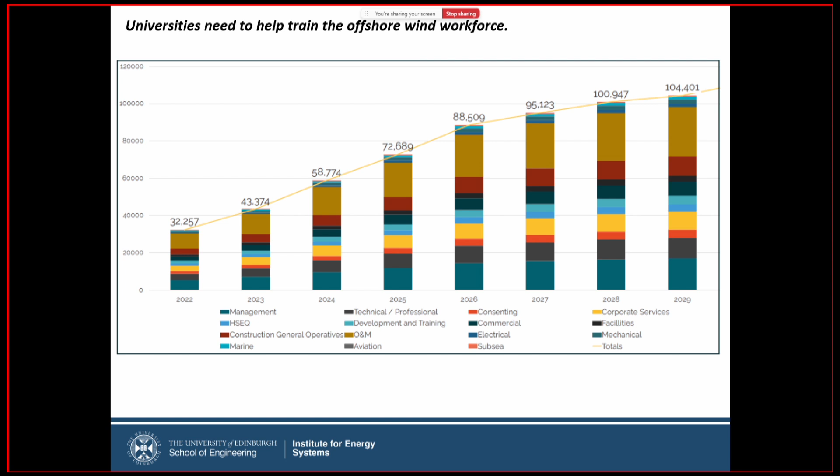The other thing, of course, is the number of people this is going to require. And that's the other role that we as universities across Scotland can help with: helping to train the generations of different engineers and other types of wind farm and wind turbine specialists that are required in this industry. So I think that's maybe the one thing that I would like to leave you with. That's almost the end of the talk.